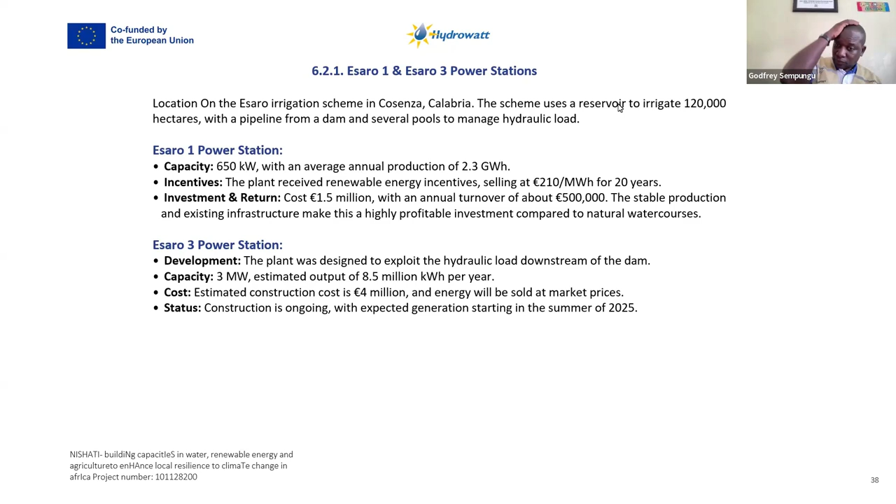How many people are connected? At the moment, 12, 30, 14, but the number increases each second, don't worry. They keep on changing, but I see. Usually we reach 65, 70 people connected. Some of them, for example, in SUA, they are all in the same room, so one link, but many people in the room.

Good afternoon. Good afternoon to everybody. Let me start as in the previous days. I would like to introduce the new lesson of Flavio Andreoli Bonazzi, the CEO of Hydrowatt. Flavio, I will give you the floor so you will better explain what we are going to do. But the idea is to show you a real business model, a way to transform an idea into a business project.

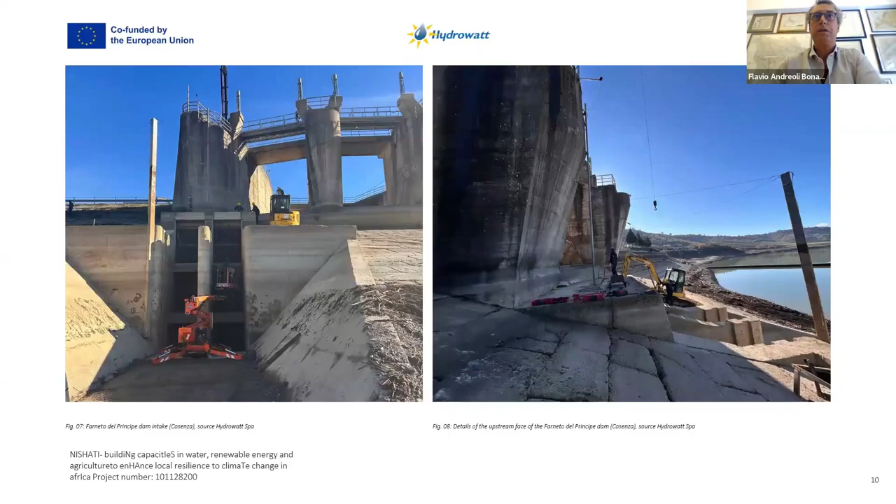Now, let's recap what we talked about last time. I started with the notion of infrastructure. Let's go back. You see the idea of infrastructure. So what are we talking about? We are talking about development, okay? The scope of Nishati, the scope of the skill labs, is to think about development of your community and of your country. Particularly, I would foster the idea of local development.

The development is based on what? Development is based on infrastructures. What is an infrastructure? Infrastructure, as I mentioned, is the complex of capital goods that provide a series of services: roads, railway lines, ports, etc. What is the basic characteristic of an infrastructure? They are capital intensive and permanent works for decades. Building an infrastructure, whatever it may be, requires a huge investment concentrated in the initial phase of construction of the work, which can be repaid during the useful life of the work through the cash flow it generates.

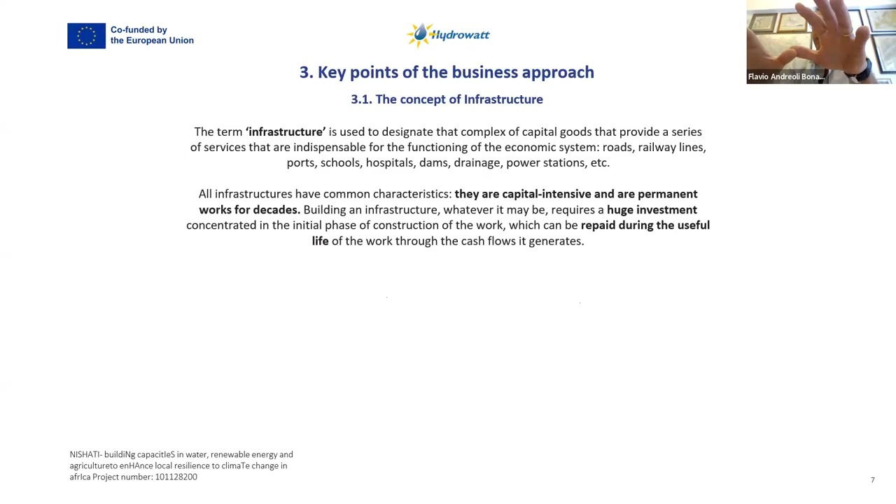So this is very important. I'm underlining this because we are not talking about engineering, we are talking about economy. So the development is based on capital goods, on money. Local development is based on local infrastructure. Could be a local hospital, a local port, a local airport, a local power plant. Now, of course, we are dealing with energy. So I will shift from the general idea of infrastructure and dive into the energy markets. But anyway, development is related to infrastructure.

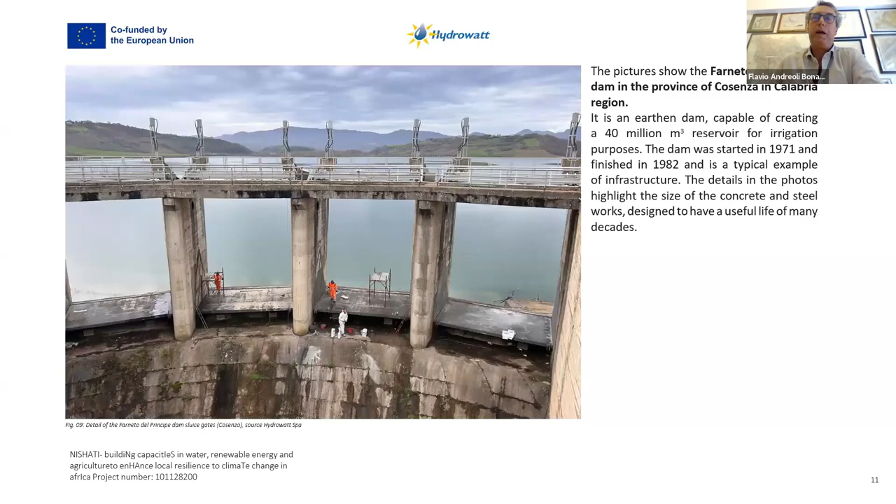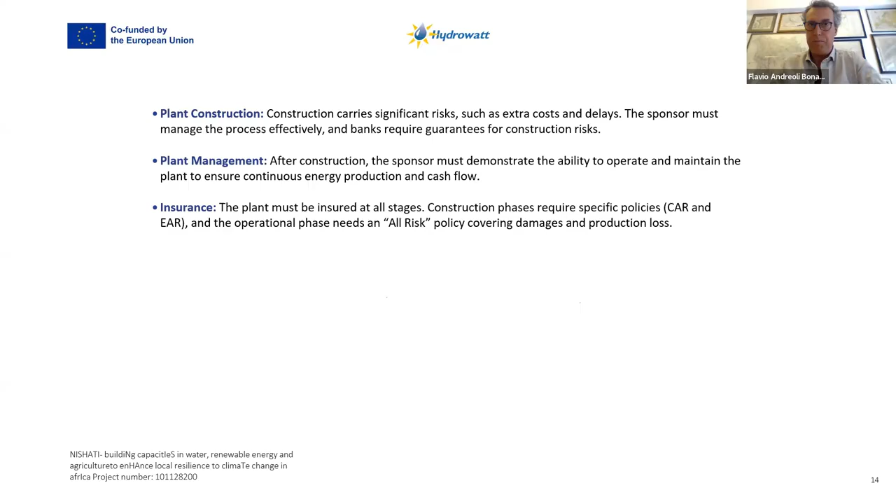So you see some examples of infrastructure. Again, useful life is very long, and a huge initial investment in infrastructure means that you have to build it up and then operate. Through the operation of your infrastructure, you can pay back the debt that you contracted in the first years. So basically, if you deal with development, you have to deal with money, first of all. And you have to find a way to facilitate the development, a model. The model I am talking about, because this is my field, is based on small-scale power plants and the contemporary use of infrastructure, both for the primary use, as an aqueduct or irrigation, and energy. Okay, let's go.

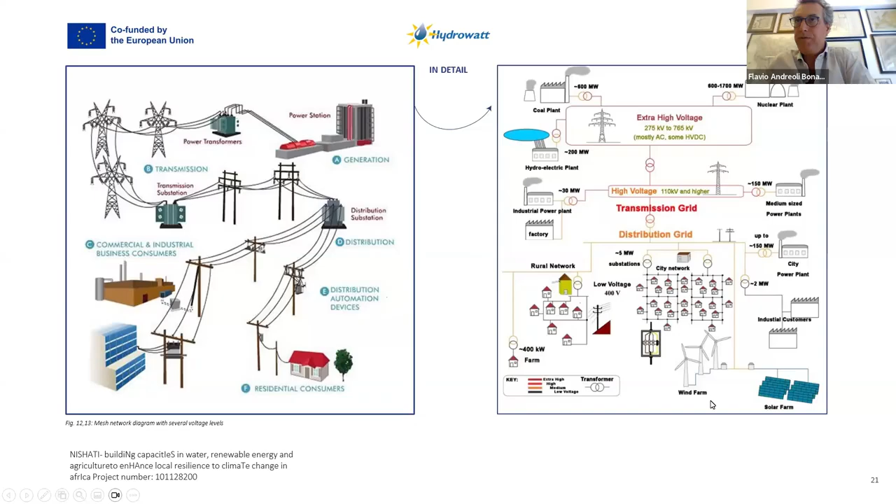Okay, this is the model I am suggesting to pursue, and I think it's the right model for your communities, independently from the source. So you can use PV, wind farms, water, or biomass. Okay. This is basically our history. This is what we have used.

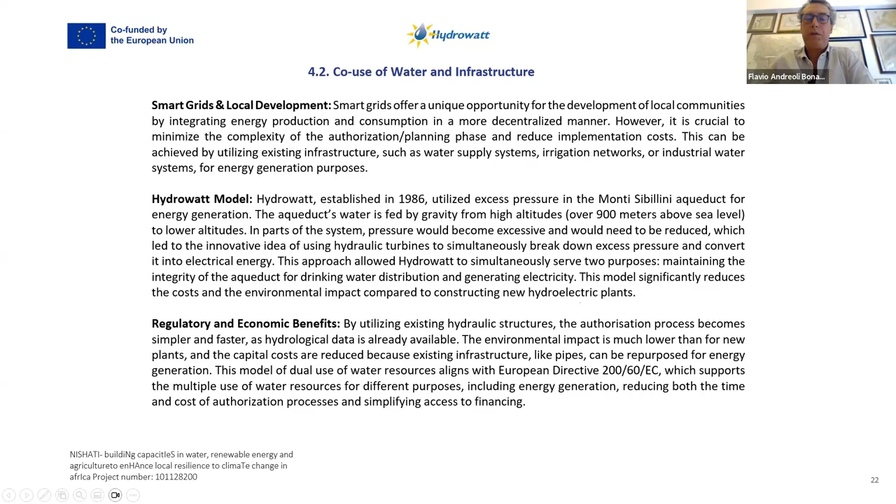What we are doing here, we are using the turbine as a dissipator, but we are not actually dissipating. We are transforming the excess of pressure, of gravity energy, into mechanical energy, and after that into electrical energy. The same thing we do in the canals. I've shown you the video. So we have a drop of head, about 12 meters here, loss of elevation of the channel, and we are using the excess.

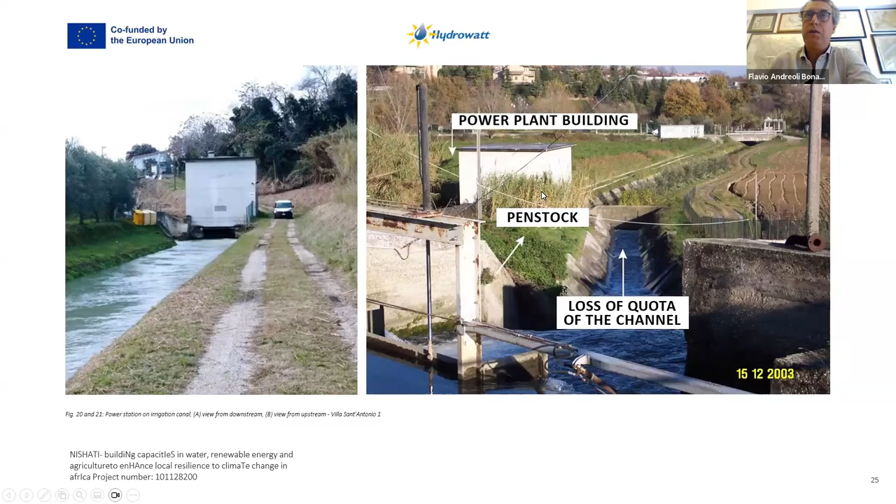This is actually the same concept as the aqueduct, but that one is in a pressurized pipe. This is a free flow canal. So we are using the excess of drop and flow, of course, to transform it into power. It's exactly the same thing.

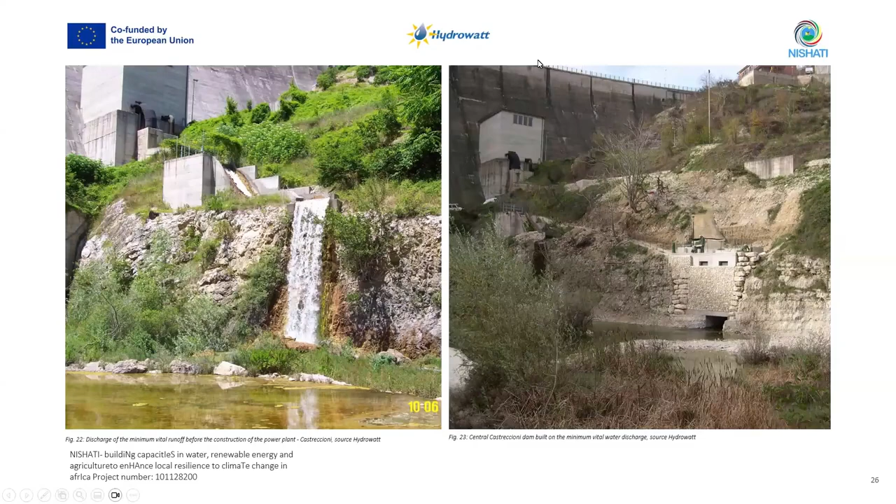This is the minimum discharge of a dam. You see, this is a big dam. This is the minimum discharge that must go to the river. And we are using this flow and this head. The head is the whole height of the dam. Imagine that the water is at this level. So we have about 100 meters of head, and we are transforming this head into electrical power.

And the same thing could be applied to biomass. In my case, I'm using wood biomass, wood chips coming from the waste of the rotational cutting of forests in central Italy, because it's mandatory for the municipalities to cut the forests in order to keep them alive. Otherwise, they are going to die in a decade. So we are buying the wood waste coming from rotational forestry, and of course, the main part goes to the wood industry.

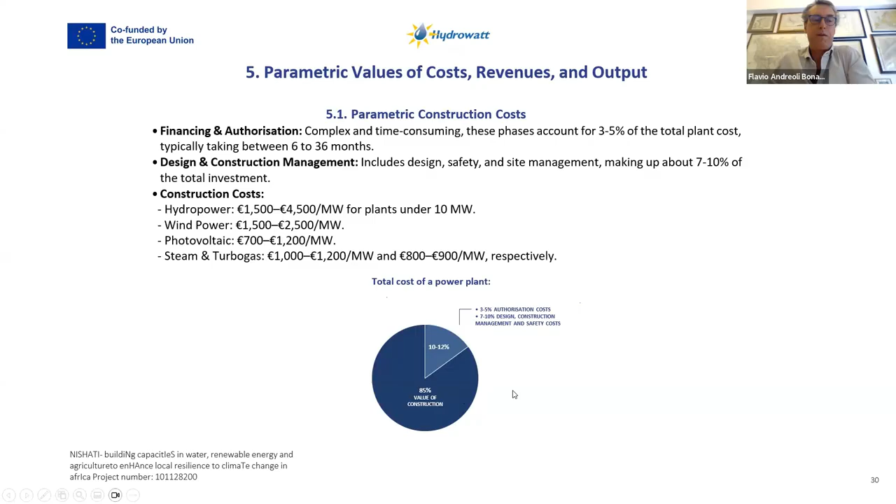So you need to have this money. You have to program your investment very, very well, very thoughtfully. Okay, then we must estimate the revenues. What are the revenues based on? On production and electricity value.

So we are producing a good. Which good are we producing? We are producing kilowatt hours. The electricity is measured in kilowatt hours. So our production, our product, is kilowatt hours. We must go to the market and sell it.

Okay, what is the electricity value? It depends on the market. It's exactly as any other good. Imagine bananas, coffee, fruit, vegetables, pineapples. Imagine what is the value of a coffee. It depends on the market.

You can understand what is the cost of production of the coffee, but the selling price depends on local and international factors. Okay, the same is for the electricity. And what's the difference between electricity and, for example, fruit and vegetables? Electricity is an international commodity, and development and sustainability of the countries are based on energy price.

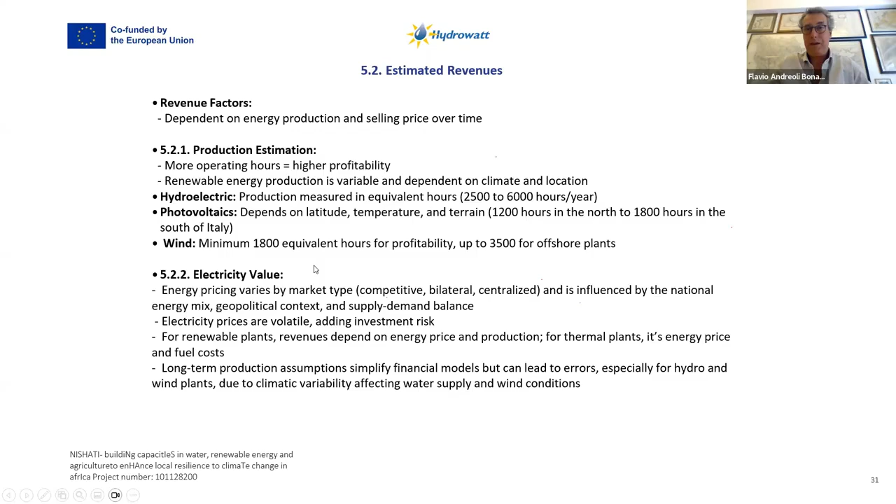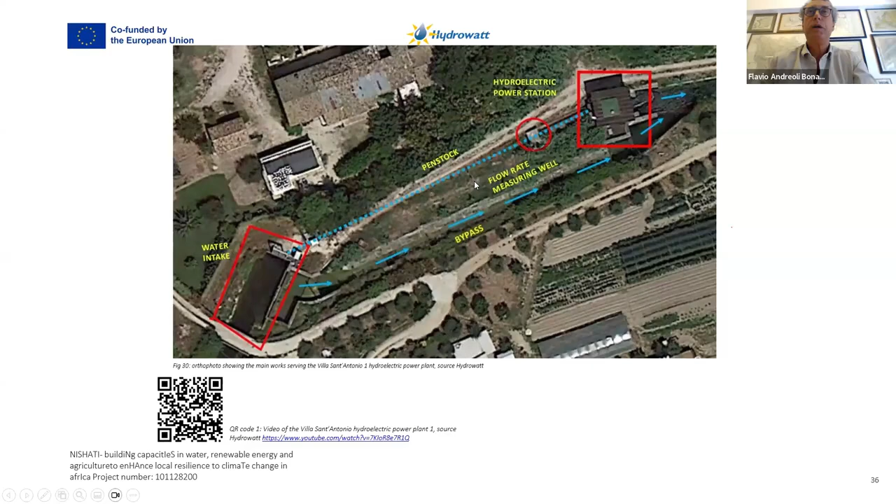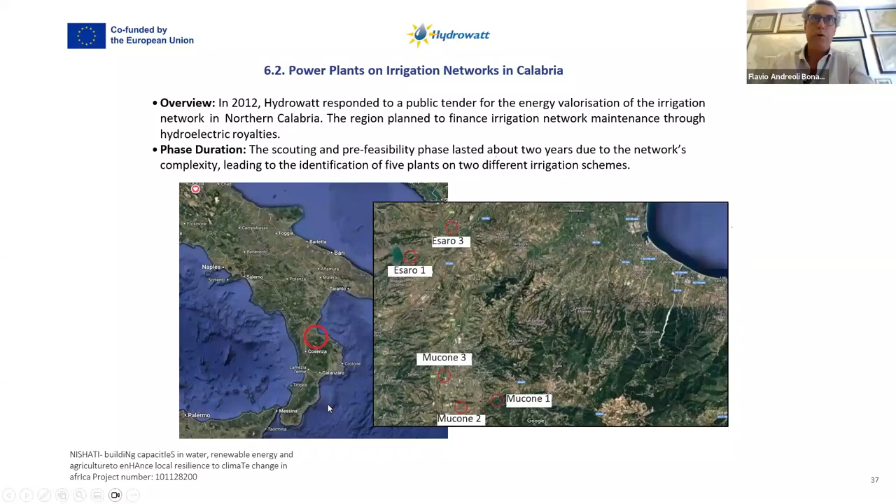This is a kind of project that I think could be typical of a local river in Africa, not the big one, but the local one. So you have to think this could be a typical project for your countries. Esaro 3, the third one, is bigger: it's 3 megawatts, estimated output 8.5 million kilowatt hours, and a cost of 4 million euros. This is the hydraulic scheme.

This is the dam. The red line is the adduction pipe, bringing the water from the dam to the irrigation system here. Those tanks that you see are tanks for the irrigation system. What we have done: with Esaro 1 we use the water coming from the river, the vital flow from the Esaro River, and then we have made a bypass of those tanks, and we use the water after the second tank, the big one, with a 3 megawatt plant, going directly to the river.

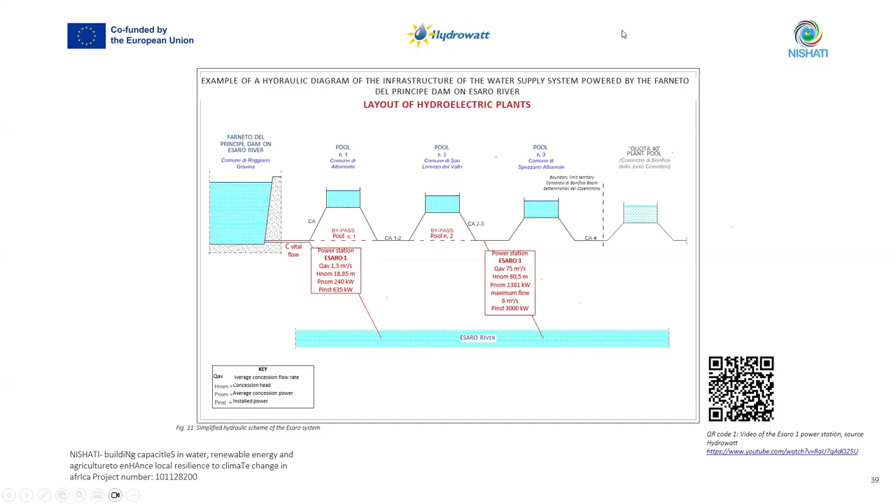There is a chat. Somebody. It is me, Flavio. You can go ahead. Okay. It was me just sharing the links to social media platforms. Go ahead. Yeah, okay. So, I don't know, maybe we can go on further.

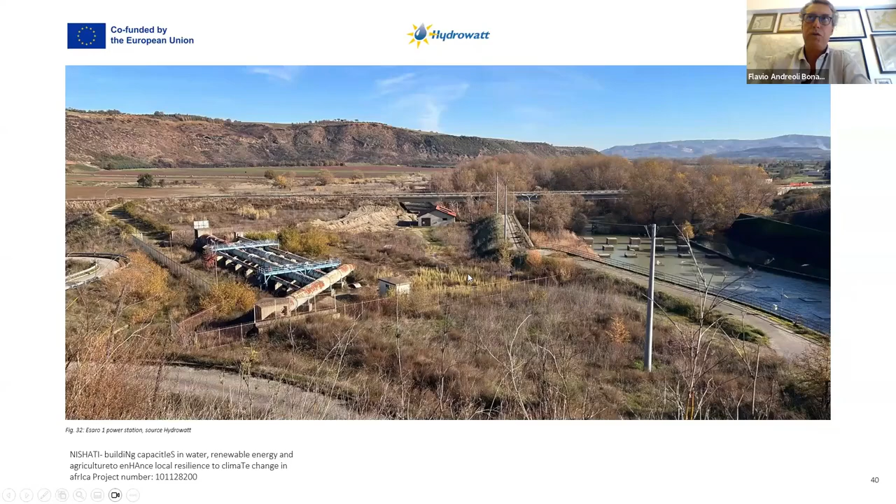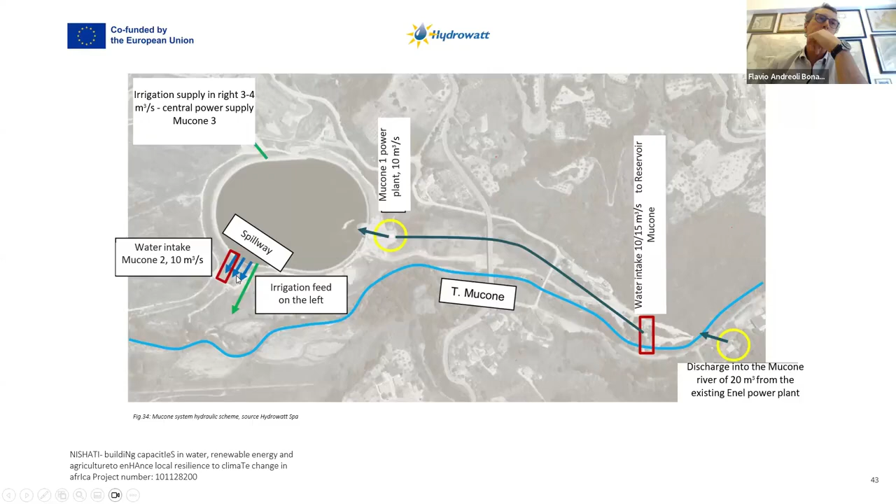We are using the spillway system, the water coming through the spillway, the blue arrows, to feed another power plant, which is Mucone 2, under project. Mucone 2 is 4.5 megawatt capacity, 13.5 million kilowatt hours, estimated cost between 6 to 7 million. I think it's more similar to 10 million today, because the price of energy has risen up very much. So you see, this is the Mucone 2.

This is the head basin that I showed you before. This is the spillway where the arrows is, and the blue one is a penstock going down the river, getting to the yellow ring where there is a power plant. From the yellow ring to the head pond, there is a head of about 80 meters, 70 meters, 75 meters. So we take the water from this basin, bring it down through a penstock, and use it for making energy. Then from the yellow dot, the water comes back to the river again.

The river is here. You see, this is the river. Where you see dark green, there is water always. So you have to get used to that - dark green means water. The water goes back here.

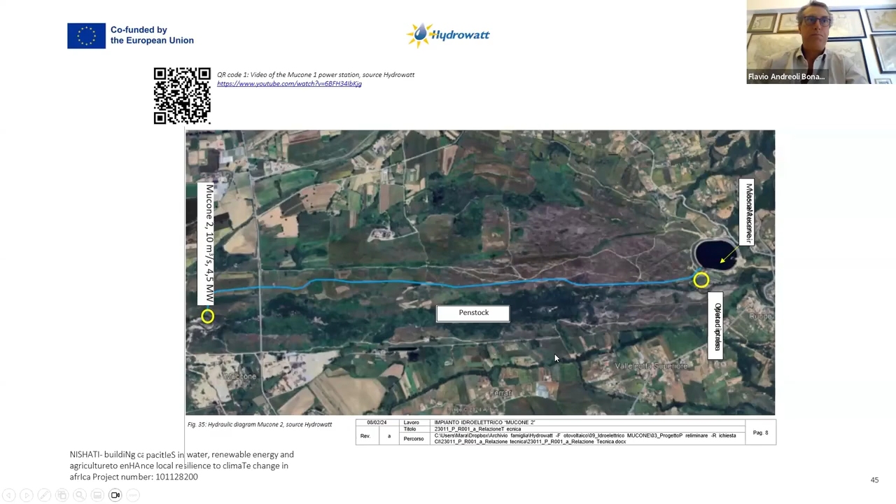I hope I can show you now - I want to show you the video. There should be a video actually. Here it is. So I'm showing you the video of this system, this one.

Is there any question? No.

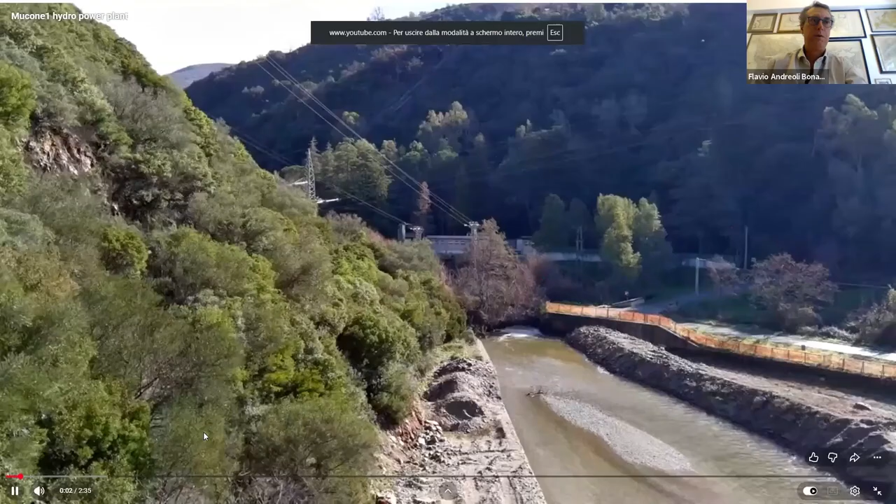Okay, let's stop it. Here there is the big state-owned plant discharging the water. See the penstock? This is the penstock of the big power plant. The big power plant is discharging from 10 to 20 cubic meters per second into this river.

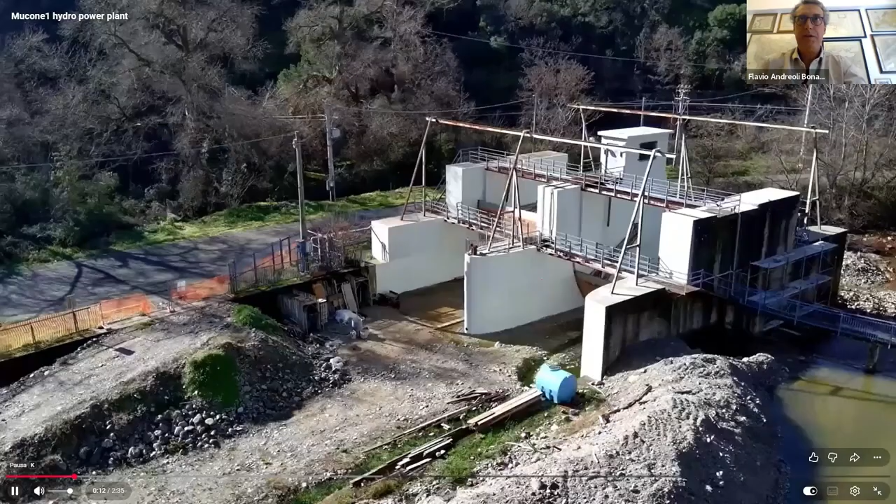Let's go on. From here, the water gets to the intake of the irrigation system. This is the intake of the irrigation system. It's quite a big work. You see, actually, this is the intake of the irrigation system.

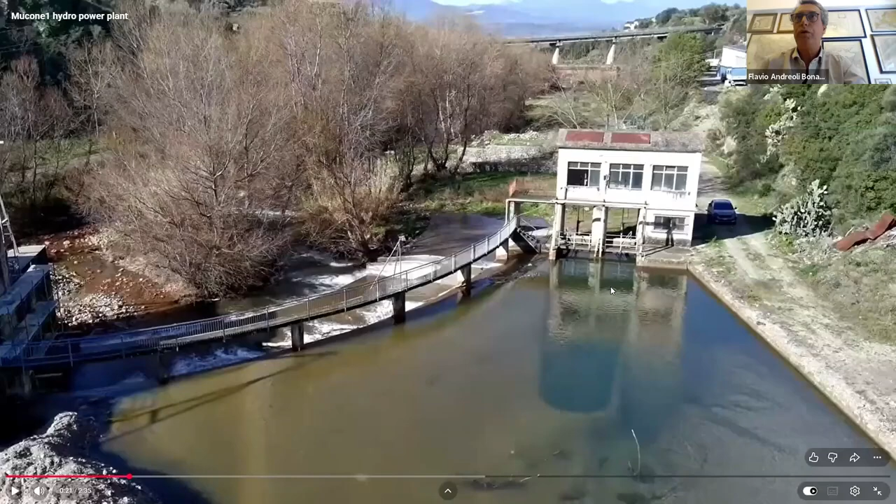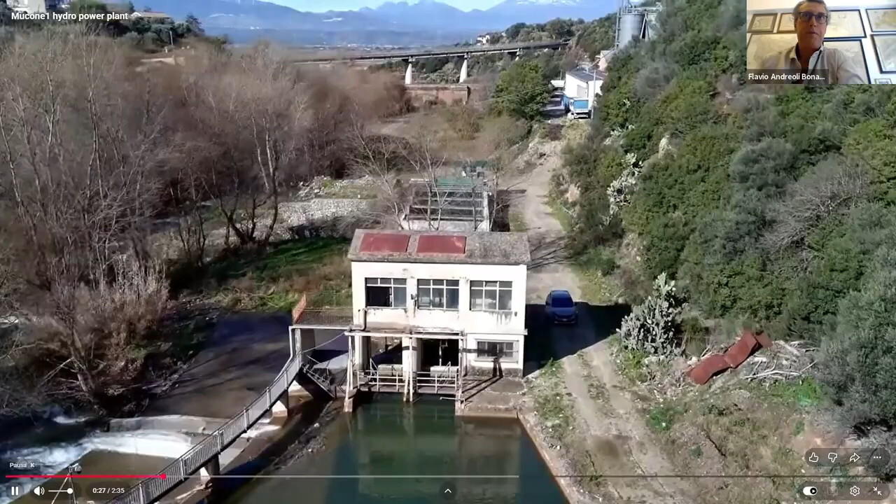There are some submerged gates here, which are open now, and the water flows into the pipes basically, and goes down the valley. So what we have done, we have intercepted the pipes here, and we have built this organ, which is a desilting organ. This means that inside this pool, which is about 20 meters long and 15 meters large, the water...

The water slows down, and the silt and sand which is flowing into the water goes down on the bottom, and the water cleans it up. See, from the desilting...

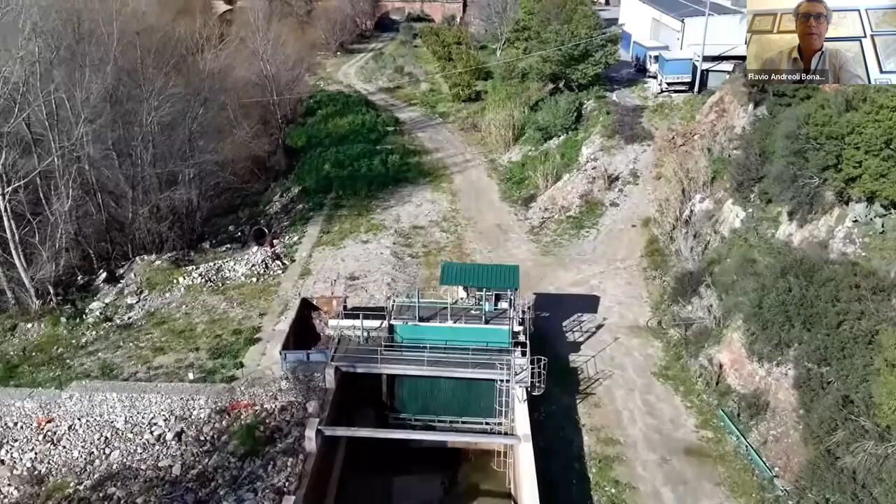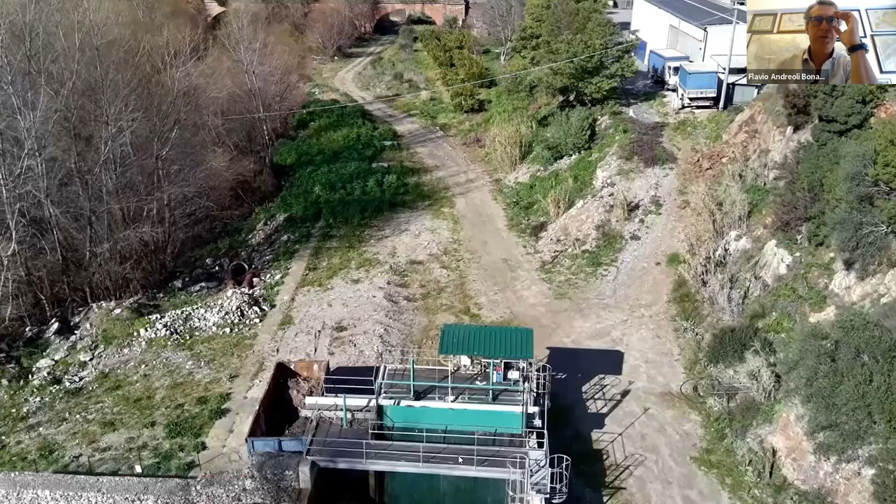Here there is another gate here. Let's see if it's visible. Okay, there is a gate here. Here there is a trash rack in order to clean superficial transportation such as woods and so on. Down here there is a gate, and the gate is open, and the water flows under the road. Under the road runs the penstock.

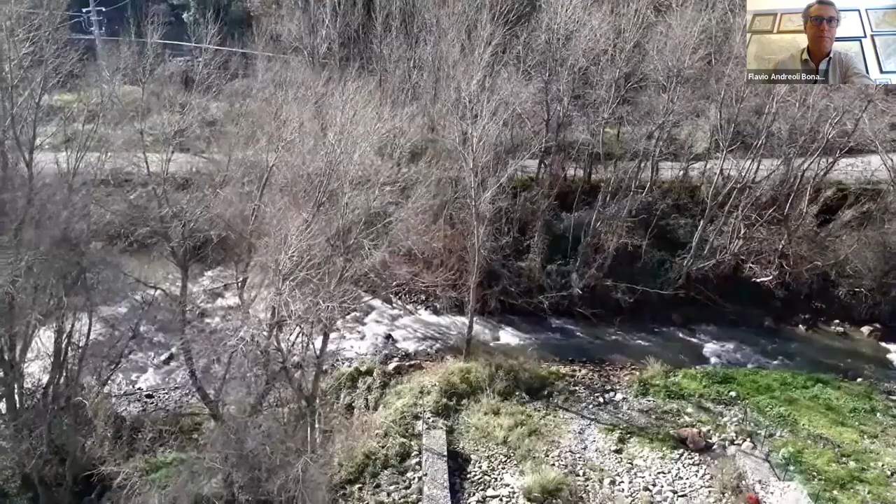Okay, so you see very well here there is the desilting tank. The water gets into the tank here, it slows down, the sand is deposited on the bottom of the pools, and you see this gate here. If we open it, the water coming in cleans everything up and flushes away the sand. The big gate is here.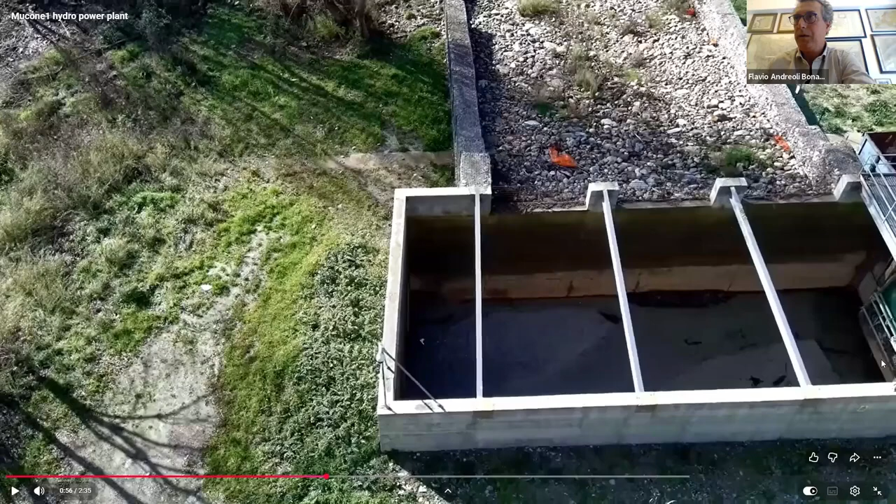Okay, so this is the intake, and now we go. You see, now we have jumped about 200 meters down the river from the canal. The pipe is running here, see, you can see from above. This is the pipe, and you see the blue pipe. We have newly built this building. It wasn't here before.

Before there was only the canal, the open canal, and the water was flowing into the canal directly into the head pond. This is the head pond of the irrigation system. The gate of the irrigation system is here. So 10 to 20 cubic meters are flowing into the pond, 3 to 4 cubic meters are flowing into the irrigation system from this point. The rest through these spillways goes back to the river, which is here.

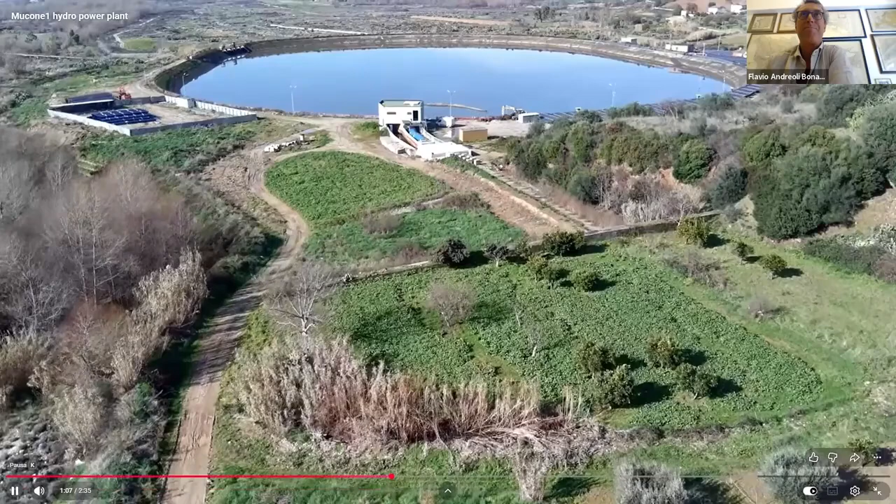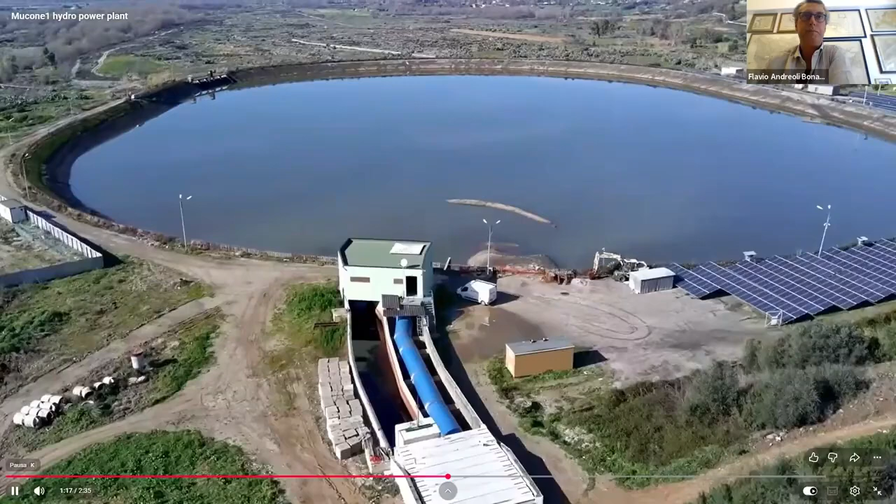What is the idea? Scouting this area, what is the idea? The idea is that the water which is not going to irrigate the fields, which are about 7 to 8 kilometers this direction, must flow back to the river, which is here, you see the trees. But if we intercept water in this area, we can use 10, let's say to 15 cubic meters per second of water. We put it in, we let it flow in a penstock. We let it run underground here for about 4 kilometers, and in this area we can build the power plant, the powerhouse with a turbine and producing energy. This is the idea of Mucone 1.

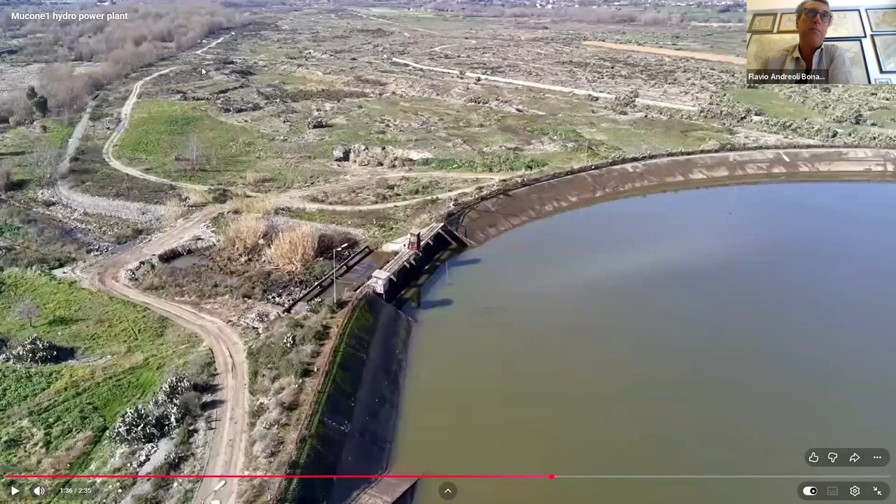You see, this is a spillway, and here the water spills away and flows back to the river, which is here. If we install a pipe, a penstock, a steel pipe directly on the spillway, we can use the water which must go back to the river, and we can bring it down, flow it down, and use it for electricity. This is the idea. I'm showing this because of the idea of scouting.

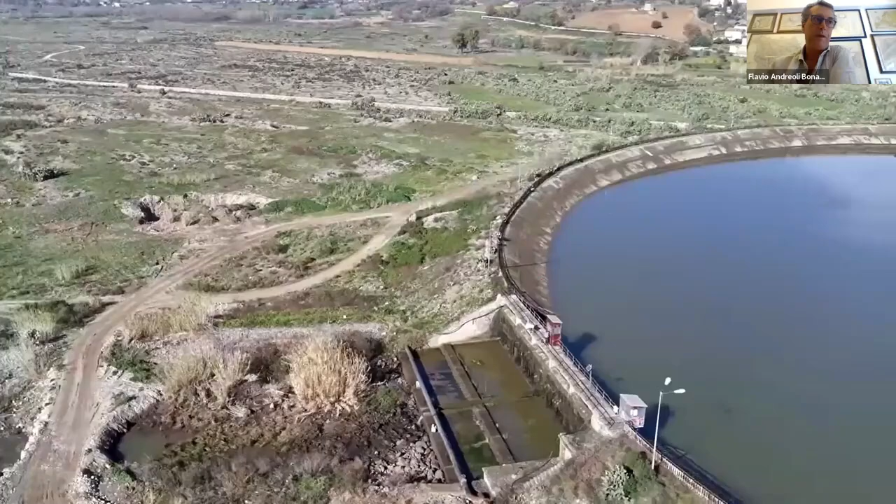So what we are talking about here is a small scale power plant utilizing already existing infrastructure. This infrastructure has been built 50 years ago. This canal was built 50 years ago, the intake was built 50 years ago. So we have scouted the territory and studied the irrigation system, saying, is there a possibility to find some excess hydraulic energy that we can exploit to make new power plants?

And we said, yes, of course. It took a lot of time and a lot of knowledge, a lot of time, and also money, because the project phase and authorization phase counts for about 10 to 12% of the overall amount. The overall cost of this power plant has been 2.5 million euros. So imagine that we have spent about 250,000 euros in order to focus the project of this power plant. Focus meaning authorizing it and financing it.

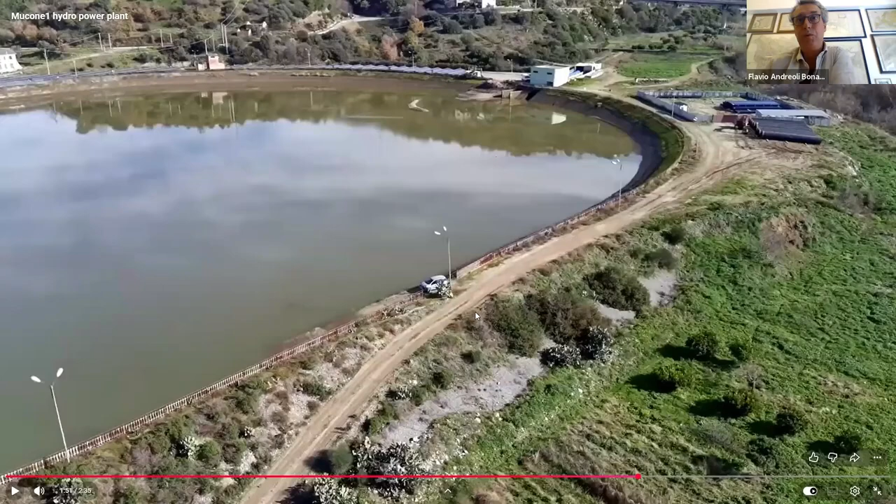And it's the same all over the world, independent from the cost of the job. So everywhere you have to keep this figure in mind. If you want to face a project, you have to think that you must have in your pocket about 10% of the overall cost of the project. Otherwise you won't be able to create the documents which are usable for financing it and for building it.

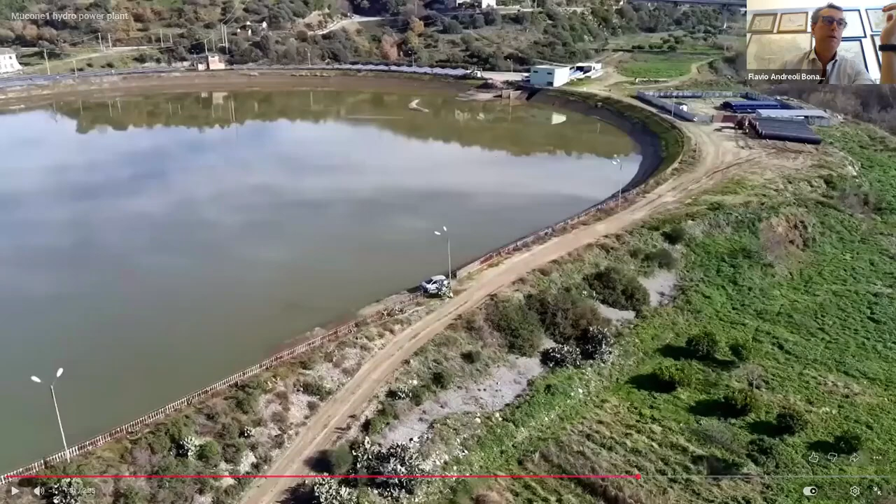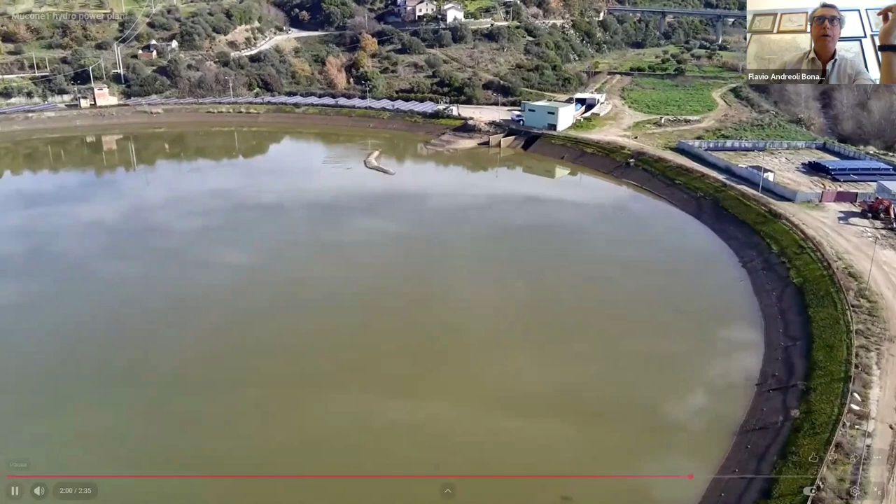Okay, let's go on. The next step, I will show you the business plan of this power plant.

Okay, let's stop here. So this power plant has been operating since 2024, and the construction phase started, I think, at the end of or beginning of 23. I think it lasted about one and a half years. So what we did, as I mentioned at the very beginning, this is an infrastructure, so this is a highly intensive cost.

We need to fund the construction of these infrastructures. The cost, as I told you, is 2.5 million. So we don't have in our pocket 2.5 million cash. You have to go to the financial system and ask them to lend you the money. Okay, so first phase, we scouted the territory. We discovered some potential.

Then we made a pre-feasibility study. From the pre-feasibility study, we ended up saying yes, we can make it. There is a real possibility of making a profitable investment, a sounded investment. So we prepared a document, which is the business plan that I am going to show you after this video.

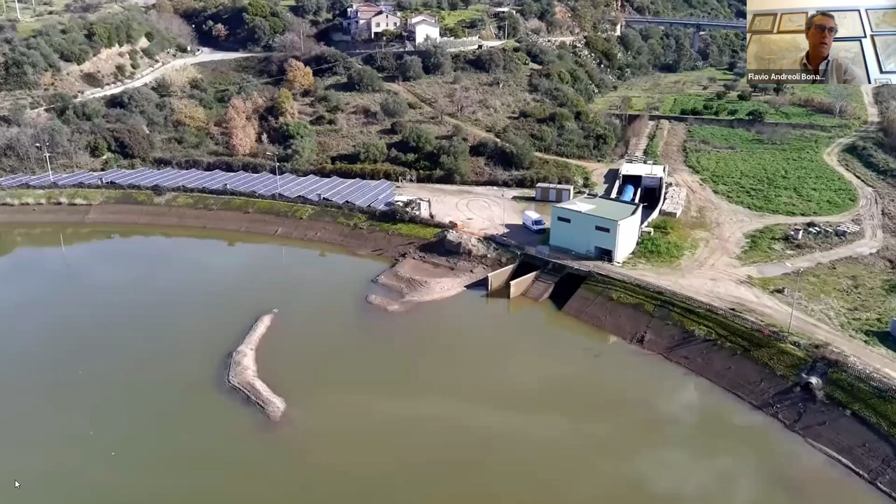The business plan I'm going to show you is related to this plant. So I've shown you this plan, and now I show you the business plan. You will see it's a complex document which we use for asking for the money from the banks, based on a feasibility study. We say: dear banks, we have studied the territory and found out this potential. We are showing you the feasibility study. Please give us the money so we can really execute the project.

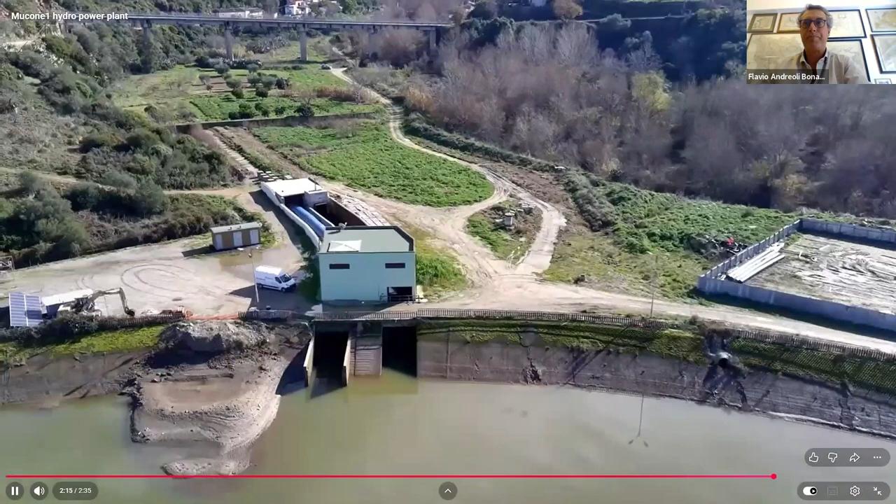See, those are all fruit and vegetables. This is a land of agriculture. South of Italy has a lot of agriculture.

Now I have to switch it off. Okay. Are you there? Okay, we are here. Yeah. Are there any questions?

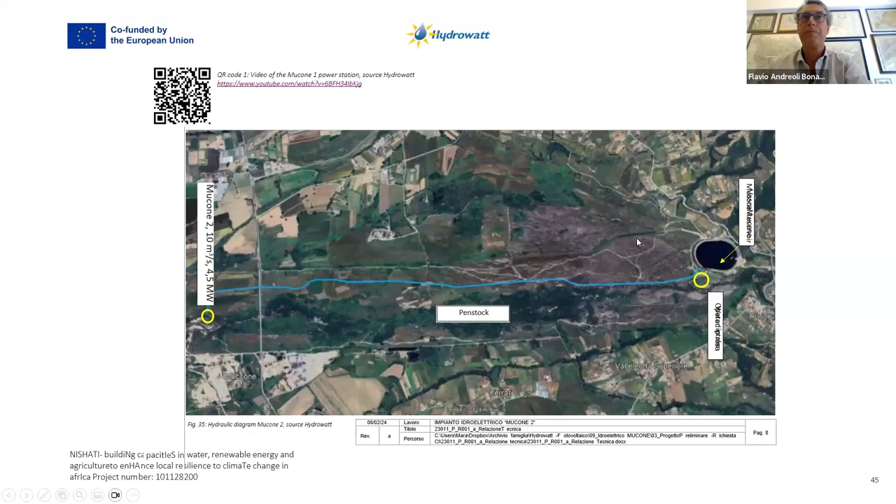No, let's go ahead. So this is the project of Mucone II. The blue one is the penstock, which we think could be attached to the spillway. This is the spillway. This is the pipe, and our pipe goes down the river.

Now let's get into the business plan.

Somebody raised a hand. No.

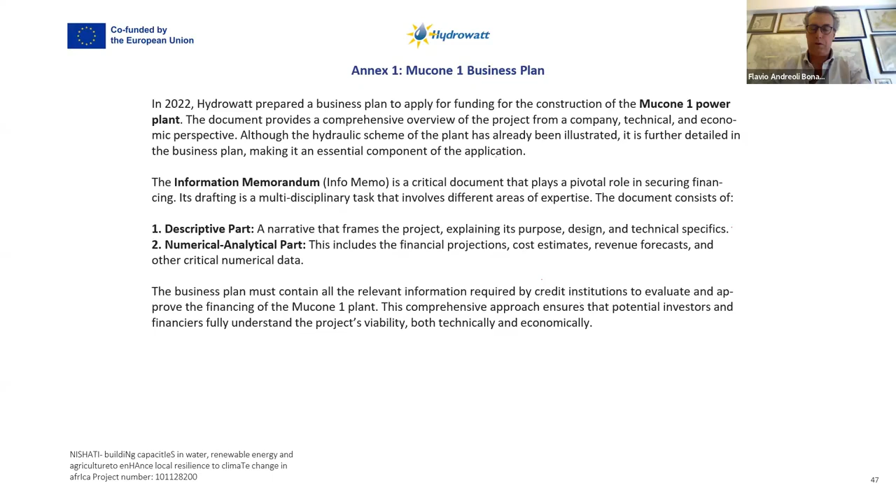This is a real case. This is the real business plan that we presented to the bank for asking for the money. See, March 2022: construction of Mucone 1 electrical plant.

So let's go through the structure of this document. Of course, this is part of the material that I released to you.

Index: purpose of the document. The purpose is to present to a potential lender the opportunity to structure a long-term loan to the company Hydrowatt for the construction of a hydroelectric plant or irrigation aqueduct fed by the Mucone River. This is the purpose - asking for the money, remember, we are asking for the money.

Who are we? We are going to ask for the money. Imagine everybody who's asking for some money for any kind of purpose says, okay, I am who? A student, an engineer, a lawyer, an entrepreneur, a local community, and so on.

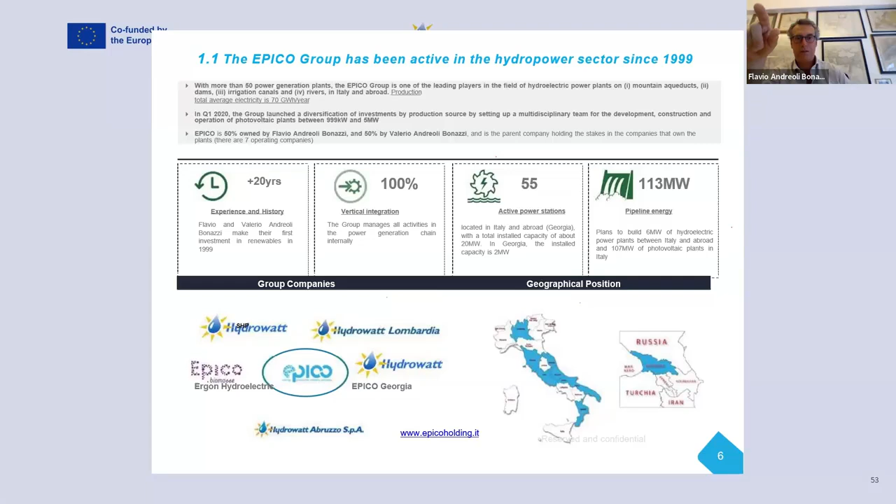So who we are: the Group Epico. This is a presentation of Group Epico. This is very important because, of course, the bank, the lenders, must have a clear idea of whom you are talking to. So basically saying who we are, in an indirect way, says look, we are serious people, we are reliable. Credit - remember in the slides I used the word credit worthiness, so we are worthy of credit.

So who we are - this is our structure. Bank, if you want to check our activity out, I give you all the information about my companies. They are clear and simple. So please, if you want to make a review of our activity, feel free.

Who are the shareholders? It's me, with a brief CV, and my brother. Physically, we have a name, we have a face. So we must go and say, we are here. We are not only companies, but we are partners of this company.

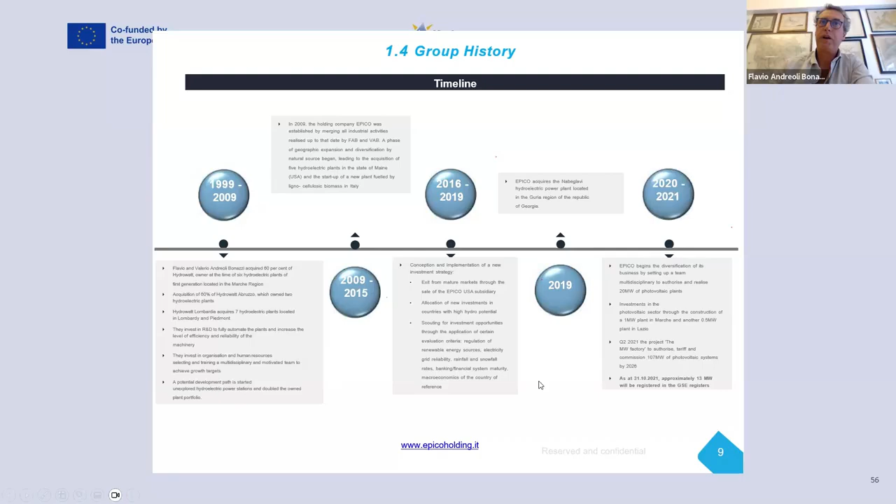And the history, our history. So the financial system can check even our past. And we can, on the other hand, demonstrate that we have walked through a successful trail, that we have been successful because we have installed tens of power plants, and so we are worthy of credit for the Mucone 1 power plant.

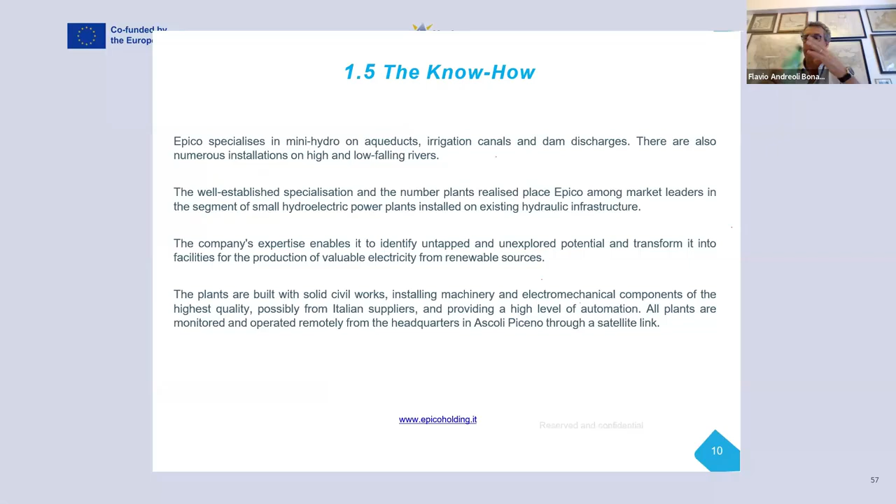Okay, the know-how. So we are describing our know-how, basically, what is our core business and what we do. And basically, very briefly, it's not a long story. The organization structure. Okay, we must tell them, yes, this is me, I am the partner, my brother too, and we have a good story.

We are serious people, but we also give them the practical idea why we think we are worthy of the credit. Okay, and so we are saying that our group is organized, that we have highly specialized people working with us, and we have experience and so on.

Then we are also saying, okay, we have this in our mind. We are raising money for the Mucone 1, but life doesn't end at Mucone 1. In our mind, we have other projects. We are willing to make new investments, and this is a message to the bank somehow. Say, look, we are not waiting for you, dear bank.

If you want to lend us money, that's good, but you have to know that we are very active on the market. We have other projects, and so it's easy for us to deal with other banks. On the other hand, you're saying that your company is growing, that you're increasing the investment of your company. Okay, it's a message to the bank. Now, after the general presentation, we plunge into the project.

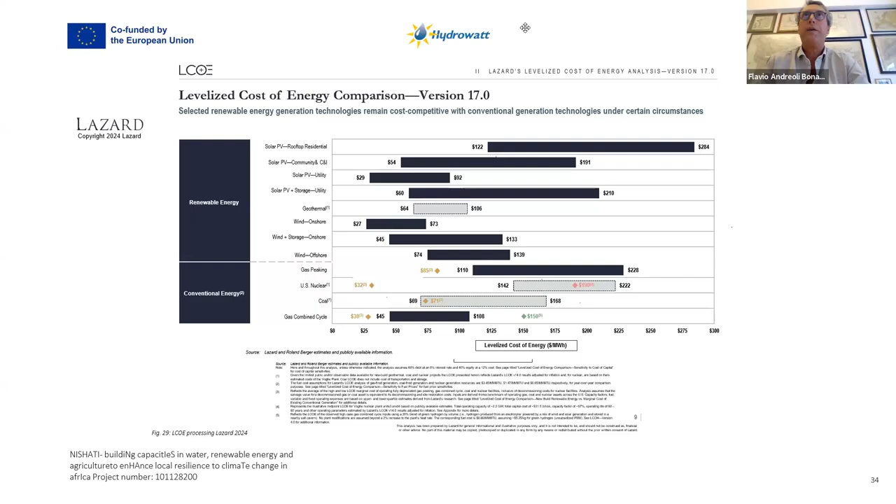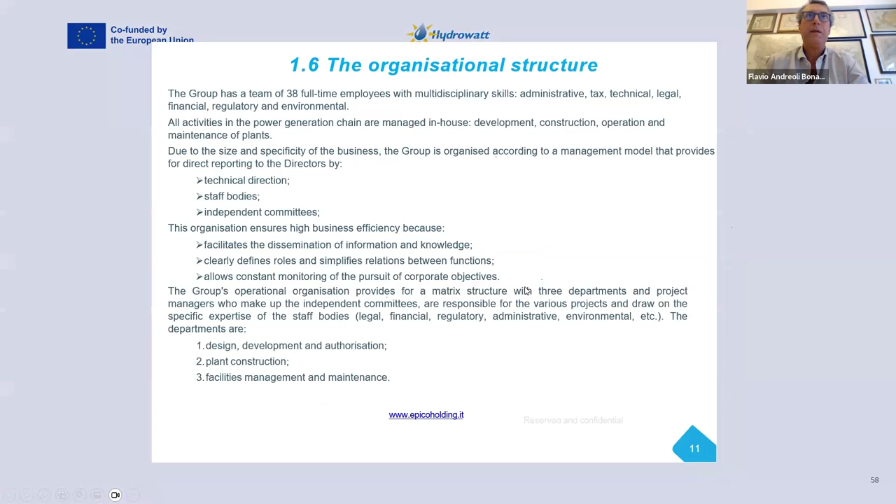Okay, is it clear? Please, Drosel. Yes, it is clear. Okay. Now, let's go. Is there any other question? No. Okay. Let's go back to the business plan. Oh, no. Okay.

So we said now we are talking about the, let's say, technical part of the project. So there is the description of the initiative. We are describing the initiative as we think it could be: the cost, the term, 30-year time, the production. The energy will be sold to the GSE, which is the Italian state, via TO, which is an inclusive tariff at 152 per megawatt hour for 20 years, at the end of which the electrical energy will be sold under, let's say, the market regime.

So we tell them the flow of the revenues. And then we talk about the company which is physically making the plant, which is Hydrowatt. So EPICO is the group owning Hydrowatt. Hydrowatt owns the project of Mucone, and so we are talking about the balance sheet of the years before and some financial information.

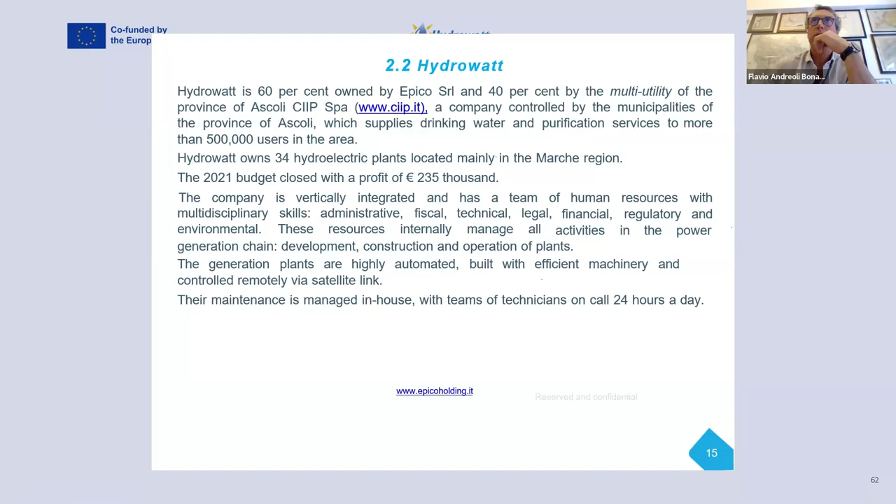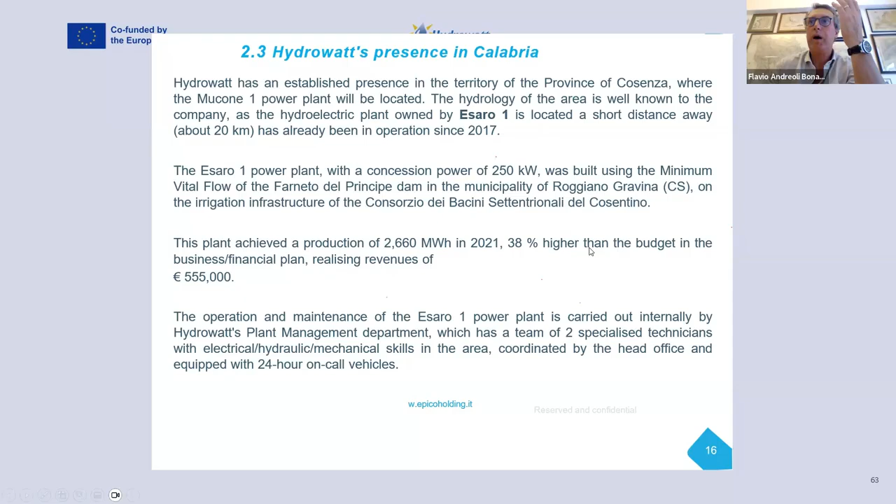Then we talk about scouting. Why Mucone 1? Why have we found that project? Because we have scouted the territory for years in that province, in that region, and so we tell them the history of our presence in the Calabria region. So we are explaining to them why we are there and why we are developing that project.

And then the authorization process and the time frame. So we give them the list of authorizations that the project has undergone, so that they know that the project is fully authorized. Okay. And now let's talk about the money.

So we have given them a lot of information about the group, the history of the group, the knowledge and the know-how of the group, about the company which holds the project, Hydrowatt. We have given them information about the project itself, the revenues, and now we are giving them information about the costs. So we have specified all the costs; this is the breakdown of the costs by category.

So building and hydraulic works, electromechanical works. You see electromechanical counts for basically 50% of the cost. Connection to the grid, works management, unforeseen events, land acquisition, in-house travel, personnel cost for site management, final and executive design, one-off royalty to the municipality, transaction cost. So if we sum all that money, except land acquisition, we see that it's 40, 60, 100, let's say 200, 250.

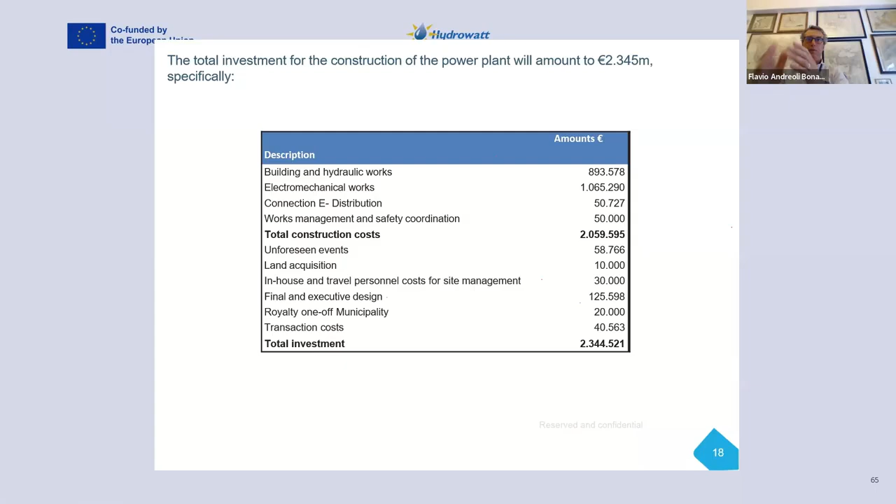And after this, what are we saying? We are asking for the money. This is page number 19. It's the core of the business plan. It's the way we are asking for the money, and let's see what we are searching for. The total investment is a maximum of 2.3 million euros. Hydrowatt intends to participate with its own resources of 20%, which are equal to 469,000 euros.

And the remaining part, 1.87 million euros, it intends to raise from the banking system at the best market conditions as an industrial loan with the following characteristics. So what we are saying is, look, dear banks, we are willing to put in 20% of equity, so 470,000 euros. The rest, we want to ask of the bank system. But we are not only saying this, we are telling you the characteristics of the loan that we would like to contract with you. And so the amount, typology, long-term financing.

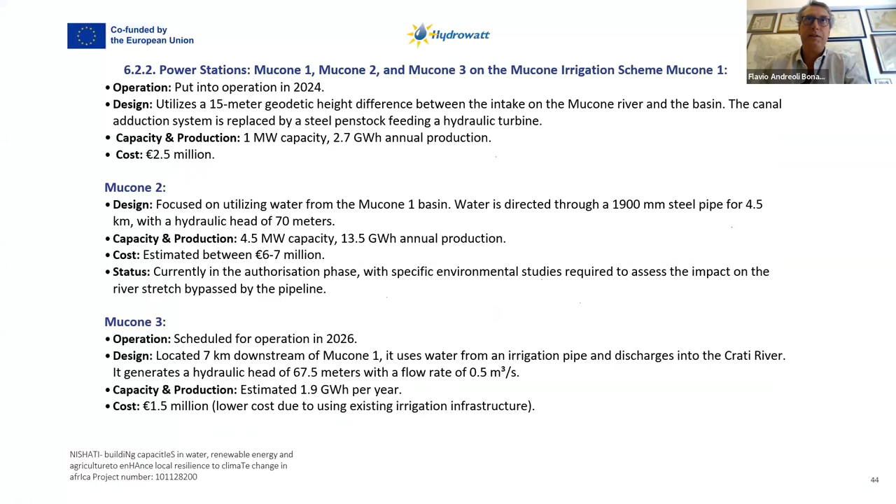Here, interest rates: you see, in the discounted cash flow system, we want to have VA high. But if we have R high, we have VA low. So R, the interest rate, it's really important to have a low value, because if you want to lend money with a high interest rate, your actual value of the plant decreases.

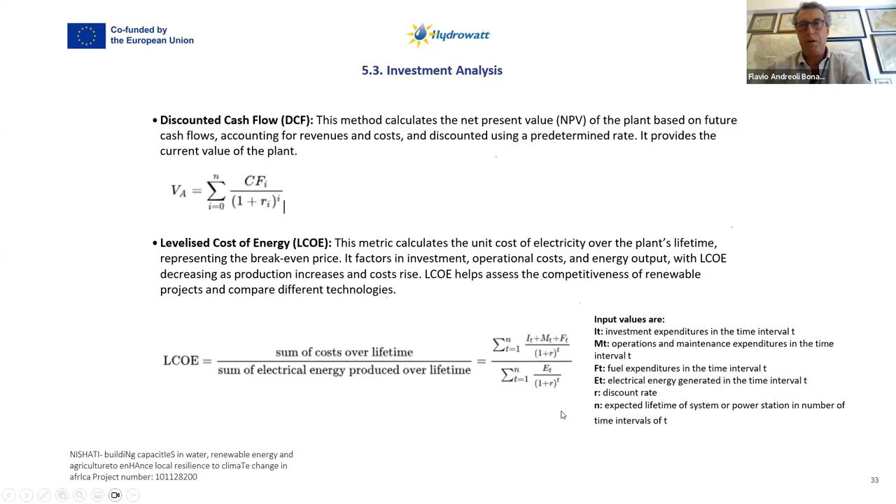If you're using levelized cost of energy, you want to have this low, because this means that the industrial cost of your energy is low. In order to have LCOE low, the same things must be low. You have to have ET, the quantity of energy, very high, and low cost of maintenance; fuel is 0. So R must be low. So you see that in both methods, discounted cash flow and levelized cost of energy, the value of the interest rate is an essential figure in order to evaluate your investment.

And so coming back to the request that we have formulated to the bank, we said 2.35% a year. Of course, we have proposed them a market value, but let's say a good market value. Security packages are the guarantees that we have to release them, and they are made of registration of lien on the machinery, direct and indirect damages insurance with a bond in favor of the lender, and transfer of credit from the sale of energy produced to the state.

Okay, so what we are saying: we are giving you a security package based on the project. We are not giving you security packages going off the perimeter of the project. So this means that we are giving you the cash flows as a securitization. We're giving you a lien on the machinery and also an insurance bond in favor of the lender. But don't ask for warranties or guarantees out of the perimeter of the project.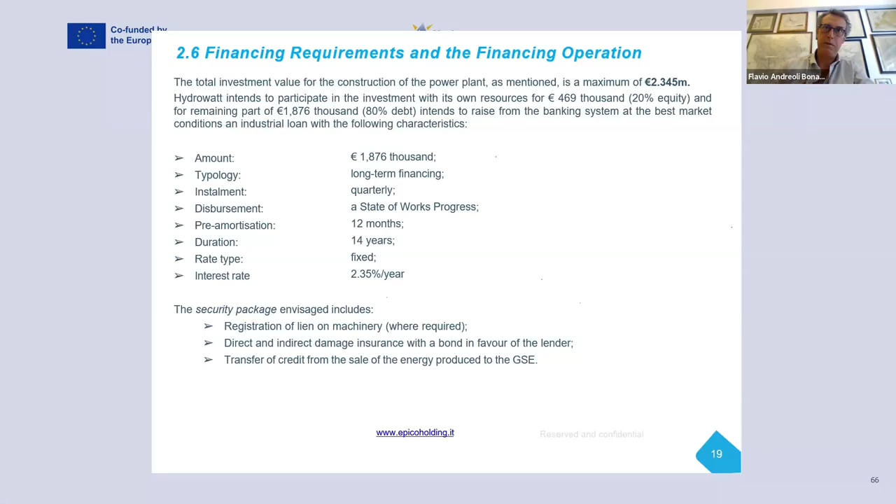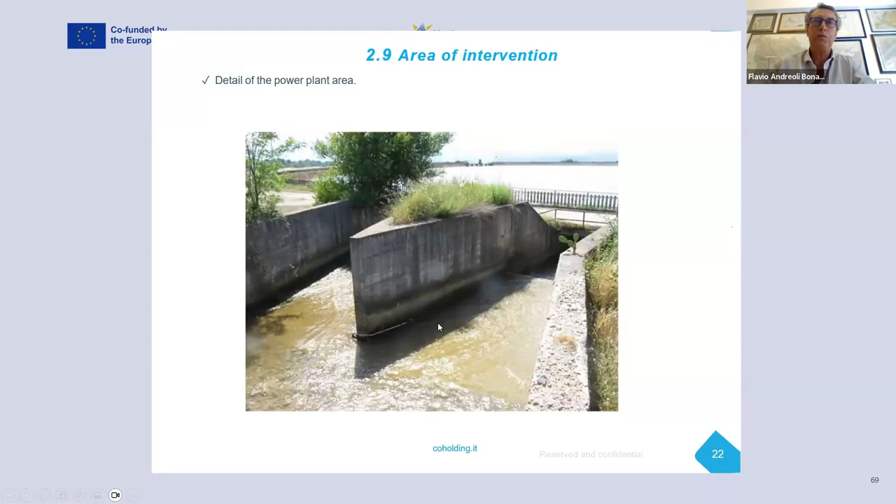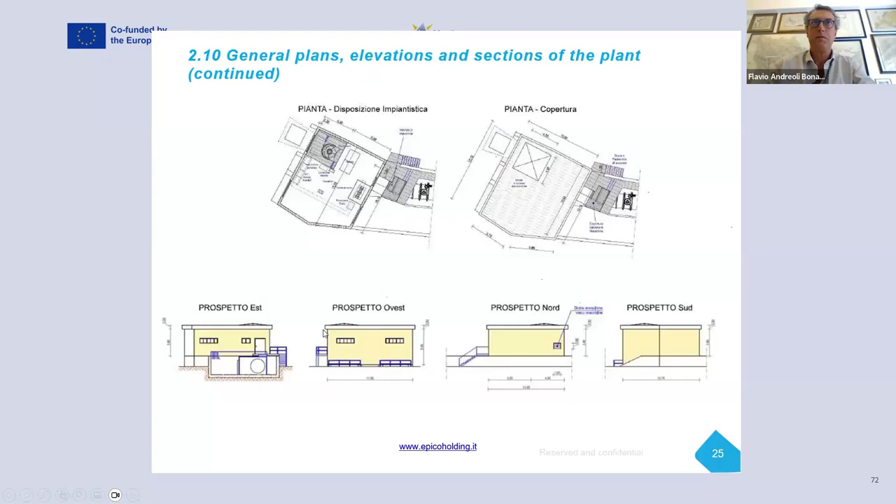Okay, then we are now getting more inside the project. So we give them some pictures and drawings. See, this is the original state of the canal. This was originally how it was. Some drawings in order to let them understand what we are talking about. So sections and plans, prospects, design, technical design. And now at the end, there is the numerical part.

Okay, so you see page number 26. This means that the first 26 pages of the information memorandum are not based on numbers. Only after 26, 27 pages arrive the numbers. Because otherwise, if you give them the numbers, those numbers are not enough, because you must explain those numbers. So here there is the overall main economic and financial data of the project: the cost, the technical data, production, sale price, tariff duration, revenues, annual EBITDA, and then the breakdown of the costs, again the annual interest rate, and the average discounted.

I'm going to show you what this number is. Okay, so this is the final financial picture. This is basically the summary of what the project means, the consistency of the project.

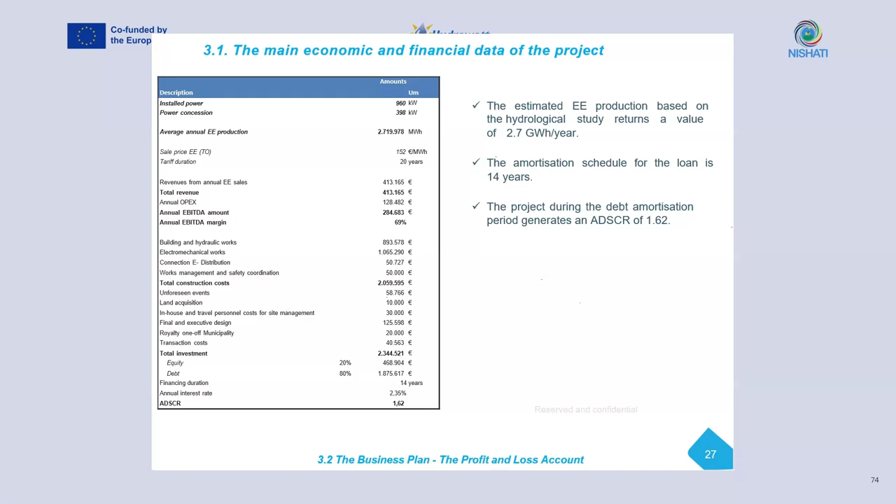Now, there was another question, and I think one was from Rosella, saying the investment seems to be huge. How long does it take for its first maintenance? No, wait, I'm reading now.

John: how will you propose an interest rate where, in many settings, I presume interest rates are set by the central banks? That's a good question, John. So the interest rate is set by the central bank. Let's say that the central bank of your country sets the interest rate at 5%. Then what does it mean? It means that the bank buys money from the state at 5%.

But remember, the banks are shops. What do the banks sell? They sell money. So they buy money and they sell money. They buy low and must sell high. If they buy at a 5% rate for themselves, they have to sell it at a 9% rate. Okay, so there is the room for negotiation.

Of course, you cannot avoid the rate of the country, of the central bank, of the international rate, for example, of the World Bank and so on. You have to base your evaluation on the real interest rate. So, for example, as I mentioned, if the central bank sets an interest rate, you have to negotiate what is above that interest rate. You have to think that if you're dealing with a bank, the bank will sell you money as high as possible.

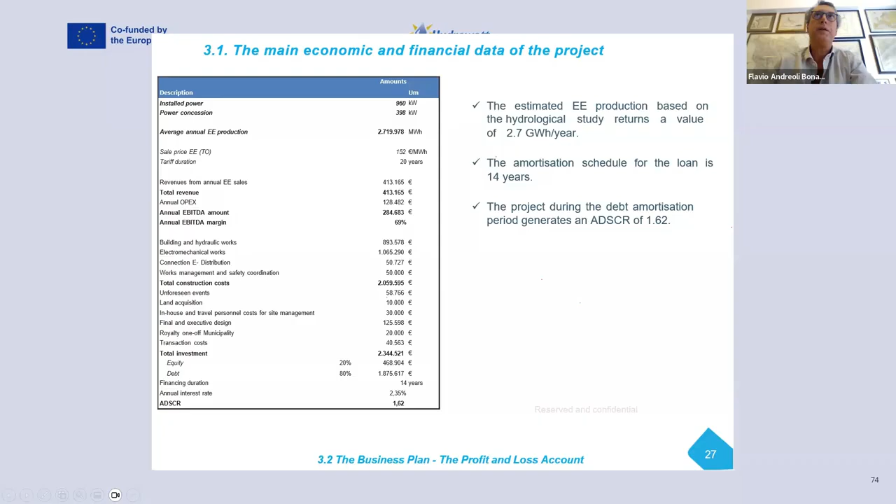Let's go back. So again, this is the final chart with the main data of the project. Now we can go to the development, the scrolling of the spreadsheet. This is a typical spreadsheet. Sometimes people confuse the spreadsheet with the business plan. The spreadsheet is not the business plan, as I mentioned. The spreadsheet is only a part of the business plan. So here is the profit and loss account.

You see the years from year number 1 to year number 15 in this case, and you see all the figures. Those are the costs: utilities, operation, maintenance, insurance, royalty, and maintenance of the consortium. Those are basically the local taxes, royalties, and concession fees. IMU is a local tax. So operating costs are 128, and the revenues minus operating costs give the EBITDA, which is 68.9% of the revenues. And you see that during all 15 years, it's quite stable.

Depreciation and amortization give you another index, which is EBIT, earnings before interest and tax, 120. The EBIT is 29.2%. The financial interest counts for 44,000, and it is decreasing over the years; the payback system is that you pay more interest at the beginning and less at the end. So the EBT, earnings before taxes, is increasing, of course, from 18% up to 26%.

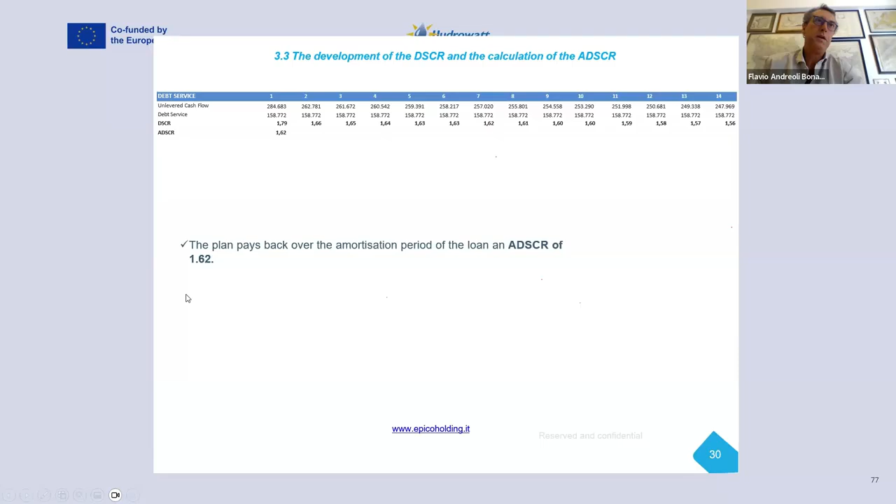So the plan, at the end, the final statement: the plan pays back over the amortization period of the loan with an ADSCR of 1.62. This is very important. Then the contacts, of course, all the people.

This is the team which has worked on the info memo: it's me, my brother, head of investment -- she's an economist, this is an engineer, technical engineer, head of administration, head of legal. So we have legal, technicians, partner, and administration. It's a teamwork.

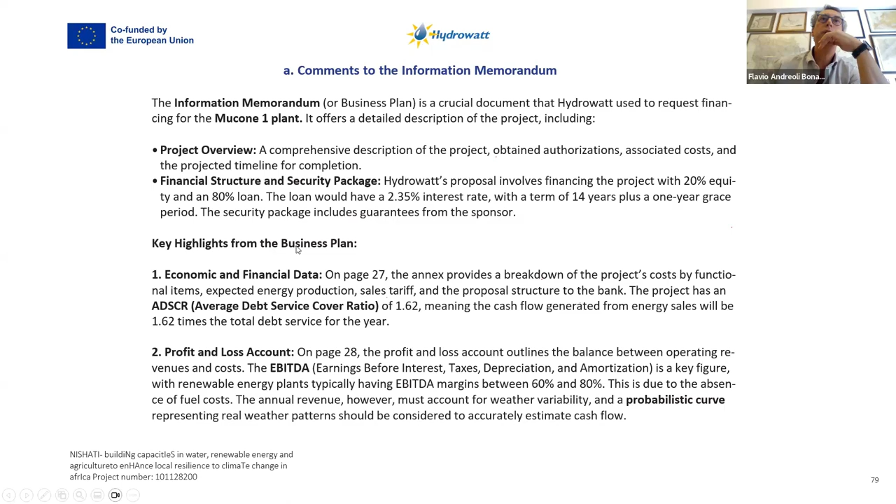Comments to the information memorandum -- I have already commented on those. Those are the key points that I have already exposed to you, the concepts I presented during the presentation, and so on.

So now, what's happened? I have actually finished the presentation. Are you there? Yes, we are there. Yeah. I have basically finished the presentation.

So now I give the floor to you. Please let me know if there are any kind of questions and so on.

I have lost the presentation.

Oh no, Flavio, I'm sorry but I've lost the presentation. I don't know where it's finished. I'll interrupt for a second, then get into it again. Just one moment.

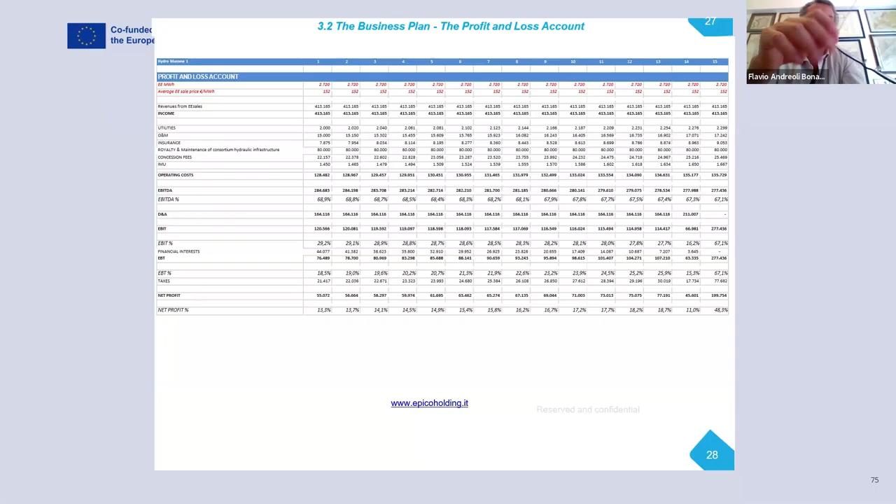Great afternoon, good presentation. So, are there other questions? There are a lot of questions, so I would like to know your ideas. Last time there was Innocent - I remember him giving me ideas about using PV power plants for agricultural systems. Is there anyone having ideas about living in your communities? You know your lands, you know the communities, you know the natural resources of your country. Have you ever thought to develop a project? So let's interact, because otherwise I tell you what I have done, but I would like also to know what you would do with your resources. So don't be shy - this is very useful. These labs are very useful in order to exchange ideas.

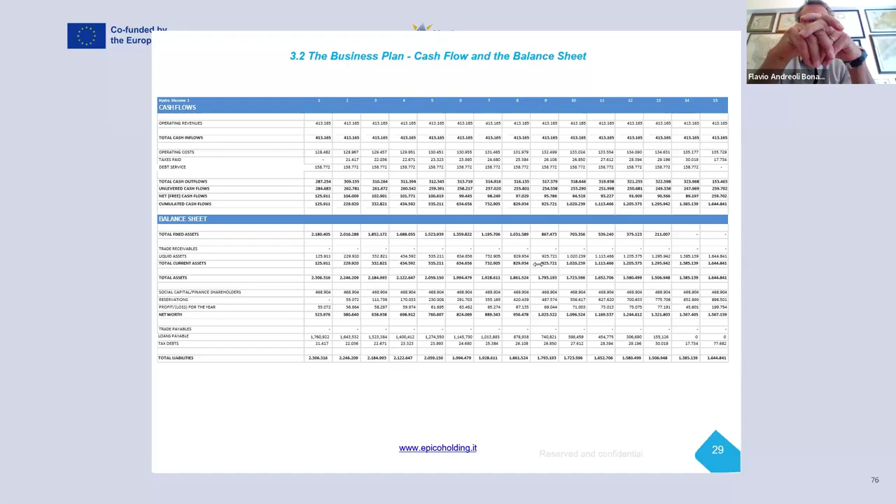Is Innocent present today? Yeah, I'm present, I'm present. Okay, Innocent, give me some ideas, because I enjoyed your idea of the PV. Tell me more about your idea, so maybe we can interact and give some more information. Go ahead.

So Innocent was proposing during the other lesson a photovoltaic system in order to recover the wastes of the farming system, but I'm not sure what he wanted to really do with the PV energy. So if you can explain, maybe we can have a real case idea.

Good evening to you all, this is Innocent from Uganda. For the PV power plant, I was thinking of it to be okay - I wanted just to have it, and then I can sell power. Then also I can have part of it powering a cold storage unit to help farmers who are actually experiencing post-harvest losses due to damages to fruits and other leafy vegetables that can't stay long after harvest. So that's how I can briefly introduce it.

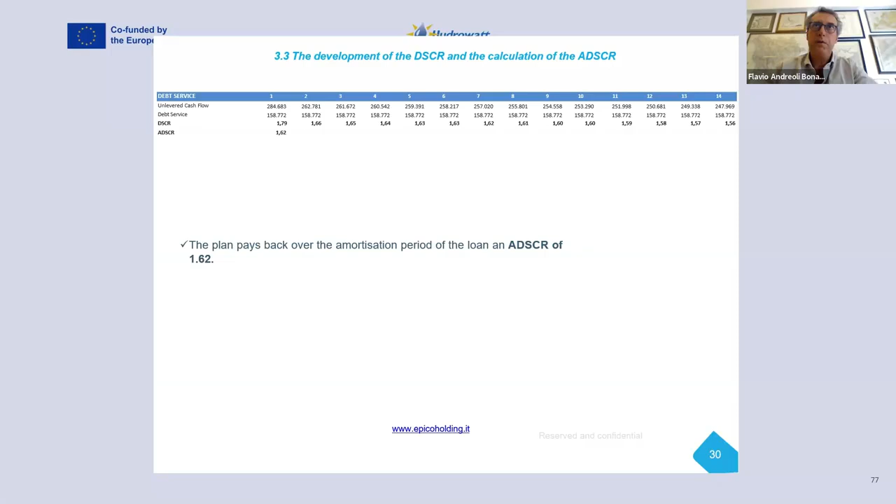I think he meant capital requirement. So you have the water, you have good quality land, so from the technical point of view your project is feasible. And again, he is lacking capital - the capital, meaning the money.

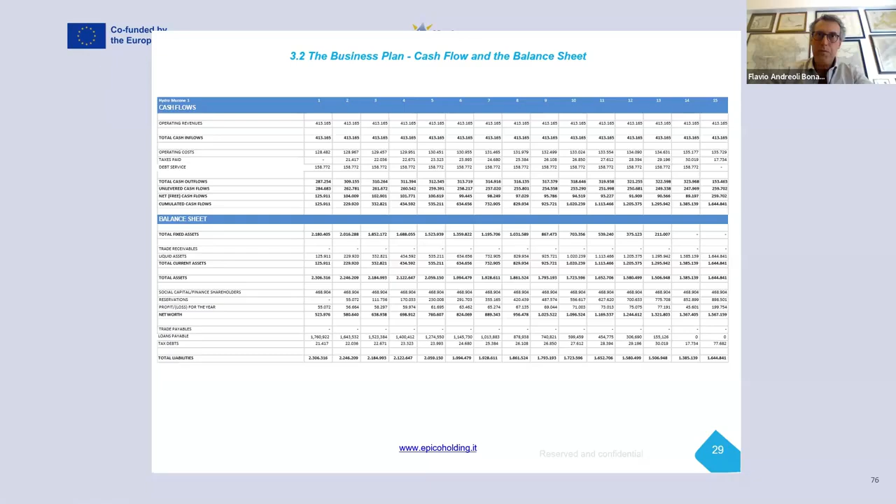And again, we are coming back to the very beginning - we are talking about infrastructures. So James wants to build an infrastructure, an irrigation system. And again, he needs the money to finance it at the very first stage, because if you're thinking about development, you have to deal with money. The money is needed to create the infrastructure.

So what I suggest is, if you have those ideas, develop them, especially in the university. Being a student at a big university helps you create a team in order to put together ideas and draw down an info memo.

Once you have the info memo, just try to put down the numbers, and once you have it ready, go to some financial institution, either national or international. In your countries, there are a lot of...

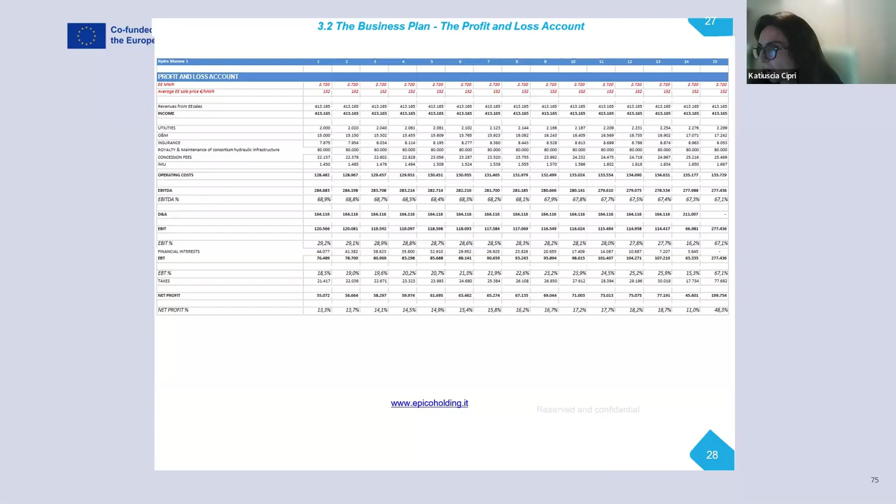I would like to add that usually we think of banks, we think of financial agencies to get money, but take into consideration that there are also opportunities now to participate in European calls, and some of them are focused on African countries. I'm looking at the CSO calls, the Erasmus calls. For example, Nishati is a project funded by the Erasmus Plus call, Youth Empowerment Fund. So there are many calls.

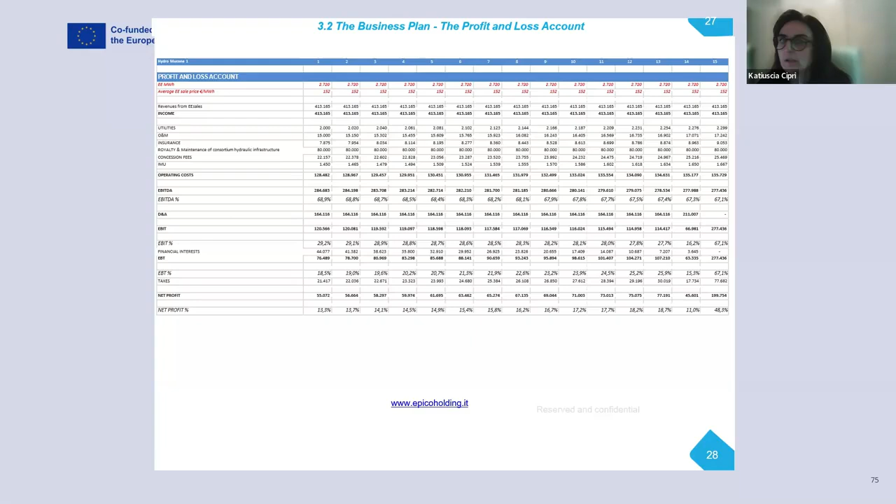You can visit the European portal in which Uganda is eligible. So I suggest you have a look, because some of them, for example, can finance testing of a prototype or some idea supporting poor people.